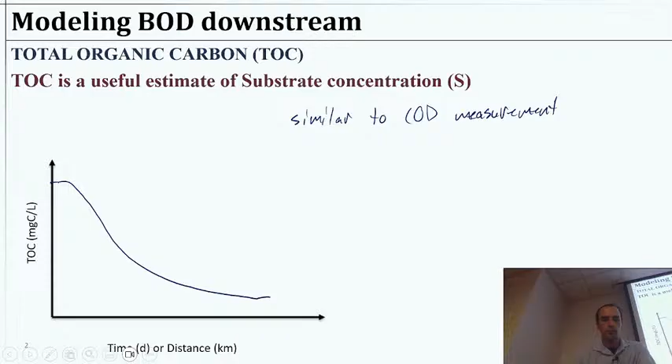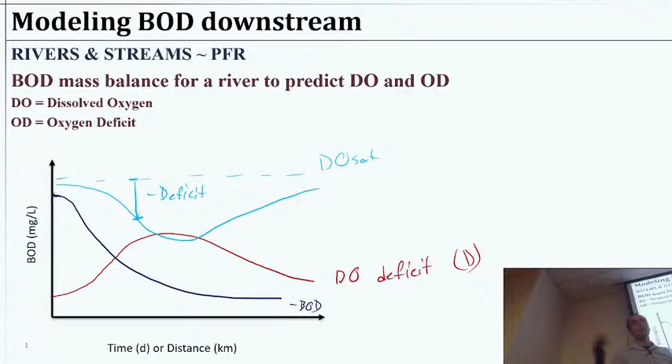So you could look at the deficit in two ways. One is just the difference between this line and the current spot—that'd be the deficit at any given point. We could potentially plot that as a value that increases up until the deficit is at a maximum, then starts decreasing again as reaeration happens. So a few ways to look at that. We talked a fair bit about that already. This would be the DO, whatever the current dissolved oxygen level would be.

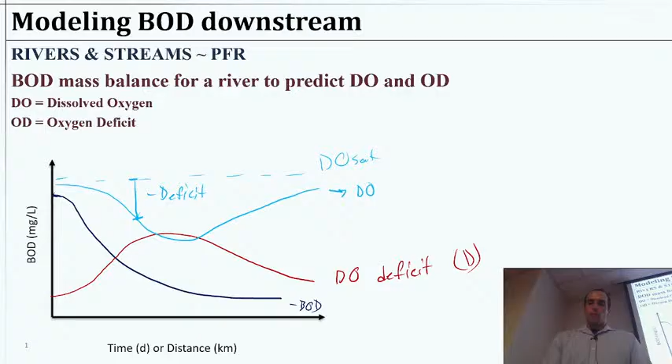So that's a useful way to look at the scope of what happens in a stream or river when we discharge biodegradable organics, wastewater stuff. We talked a little bit about how to measure it. Here was a slide where we went a little deeper on the DO. And then we began to talk about how do we model the amount of BOD that is still there.

This is kind of an odd thing to describe because the amount still there is really oxygen-demanding substances that have not demanded oxygen yet—it's a weird way to phrase it. So we can think of it as there's some ultimate amount, some initial amount. If we gave it an infinite amount of time, how much oxygen would be demanded by this food? How much food demands oxygen in our water?

We could say that at some time t, there is L sub t remaining BOD, plus whatever has been demanded up to that time. L naught would be the infinite BOD, kind of the starting point, and L sub t would be after some time, how much is remaining if at that point we gave it an infinite amount of time. So we could say L naught equals, let's say, L at day 5 plus BOD that has already been demanded at day 5. That's one way we could describe it.

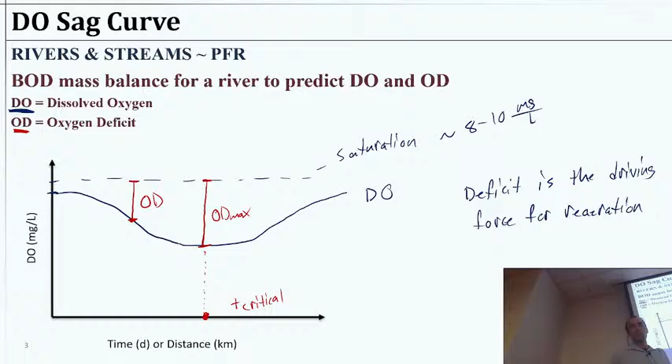We want to do this so we can have a handle on the actual amount of BOD that corresponds to what's happening with our dissolved oxygen sag curve and ultimately the stream and the biology altogether. So we can look at this L as a first order rate equation where biological activity is removing it, with some rate constant K. This would be our BOD reaction rate constant in some per-time units.

And then that's going to be rather straightforward. We're going to keep to rivers and streams for this type of analysis, so we can look at some time in a plug flow like system in a stream or a river. If I said lake, I didn't mean to - we're going to keep it to streams and rivers. That will give us some way to look at how our waste is changing as it flows.

So with that, we want to know how do we balance oxygen versus this oxygen removing action by the BOD. That's going to be this deoxygenation balanced against the re-aeration. So aeration meaning we're bubbling or somehow mixing oxygen with our water, and deoxygenation would be that rate at which the microbes are removing oxygen from the water.

So we'll have KD for the deoxygenation rate constant. That's essentially going to be the same K here, so that's our KD. RD would then be a rate of deoxygenation. We could describe that, just like we were a moment ago, as KD times L naught times e to the minus KDT - we're just connecting the dots here. That would be our rate at which we're removing oxygen from the water.

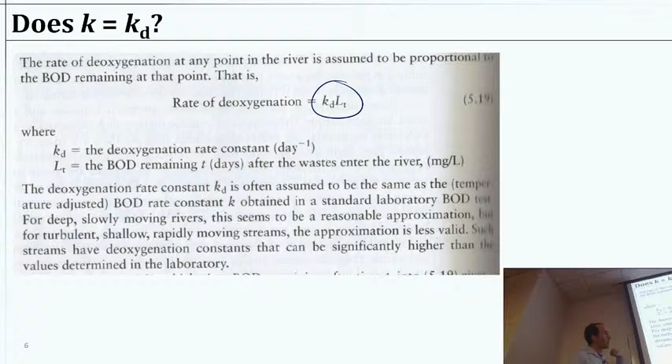But we are going to distinguish, and I think I misspoke earlier, which is why I have this slide to remind me to correct myself. The deoxygenation rate constant KD is often assumed to be the same, once temperature adjusted, to the BOD rate constant we find in a standard BOD test. For deep, slow-moving rivers that seems reasonable, but if we have a lot of reaeration, it's less valid. So we can't always say exactly that - we're going to keep those separate.

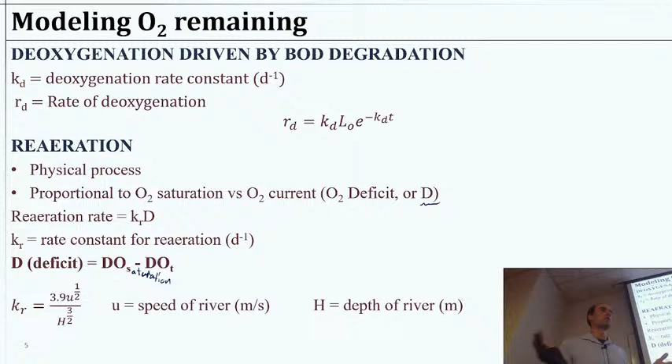I mentioned earlier this K being the same as this KD - I apologize, that's actually technically incorrect. Sometimes it's correct, sometimes it's not. So just keep this equation you'll have, I believe, on your equation sheet, in mind - a rate of deoxygenation will be related to that, but could be separate.

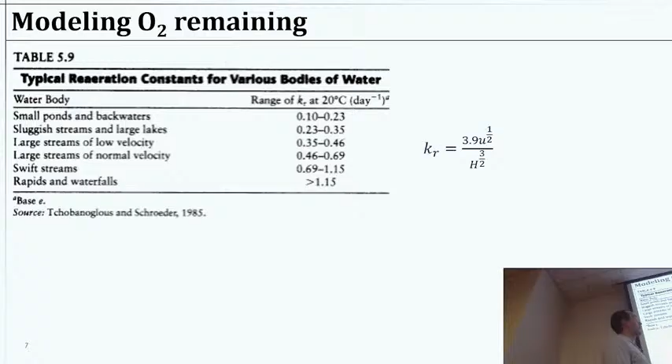Here's a few typical water bodies - what are their KR values, just as a reference point? So this is KR that we were describing. If we have a small pond or backwater, this reaeration rate constant is somewhere between 0.1 to 0.23 per day. Compare that to a sluggish stream or large lake, 0.23 to 0.35, going all the way up to rapids and waterfalls being larger than 1.15 per day as the units.

So if we put that into some calculation, we'd be able to see what that's doing to the oxygen. We could even make a plot and do some graphing about what that looks like - might be a fun use of MATLAB or something. I'm not going to make you do that.

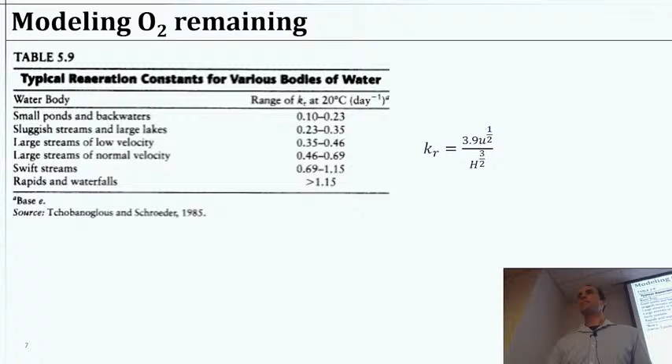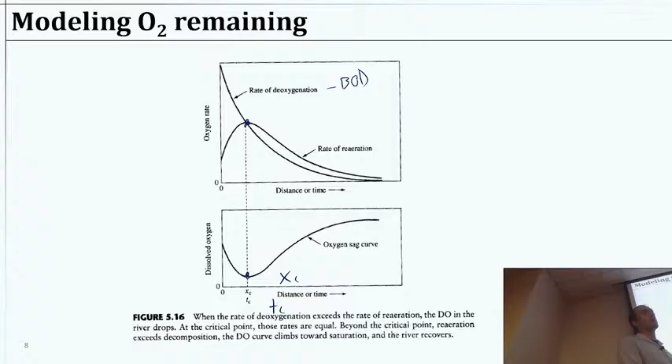But what I'd like to do is look specifically at how we determine the critical point where we have the most important impact, which is the time when we reach the highest deficit, or the lowest dissolved oxygen amount. Those are the key moments we're really concerned about, and want to design our treatment to make sure that moment isn't so bad that it causes a fish kill or otherwise harms the environment. Because if we can discharge just a small amount of BOD and nothing bad happens to the environment, that's probably what we want to be doing.

It probably doesn't make sense to try to get rid of 100% of the BOD, but it also doesn't make sense to kill everything. So putting all these curves together, if we draw it better than I did earlier, we can identify a critical point. As BOD is dropping through here, our rate of reaeration is going to start increasing because we're getting some oxygen deficit. So we'll have increasing reaeration rate up to a point, which caps out when our oxygen deficit is at its maximum. If we look at our dissolved oxygen here, the lowest point - this is the largest deficit, D.

That's going to be the moment where our reaeration is happening the fastest, and we can learn something about the whole system. We can also identify this critical time point, TC, or this critical distance. If we're discharging here, how many miles downstream does this happen? What town or place is affected could be quite important, especially if we're trying to figure out who's causing the problem when we find a patch of the stream with degraded water quality.

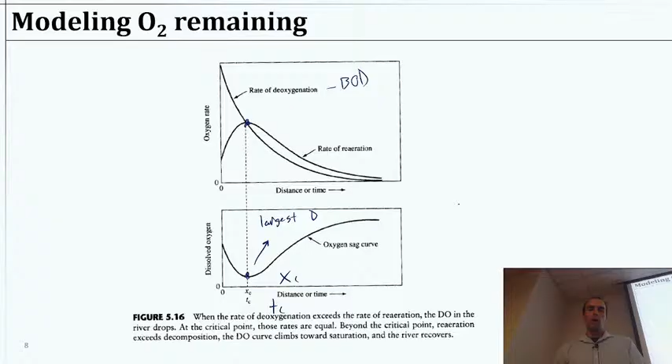Okay, so to model this, we want to take a look at some equations. To model the oxygen deficit, we could start with dD/dt, the rate at which the deficit is changing. This is equal to the rate of deoxygenation minus the reaeration. This feels a little upside down because we're talking about the deficit, the lack of something, so to track its change we say deoxygenation rate minus reaeration rate.

If we take those two rates we described earlier, they are Kd times L naught times e to the minus Kt — that's our deoxygenation rate — minus the reaeration rate, which is a little simpler, Krd.

All right, so take a moment and integrate that.

Yes, that should also be Kd, sorry. And I'm just kidding, by the way — this is a tough integral, we're not going to do that, we're not even going to bother with that. Fortunately, the book does that and gives us an answer. As we'll see, this is probably something you could do if you go back to calculus and scheme about all of that, but we're just going to take the book at its word.

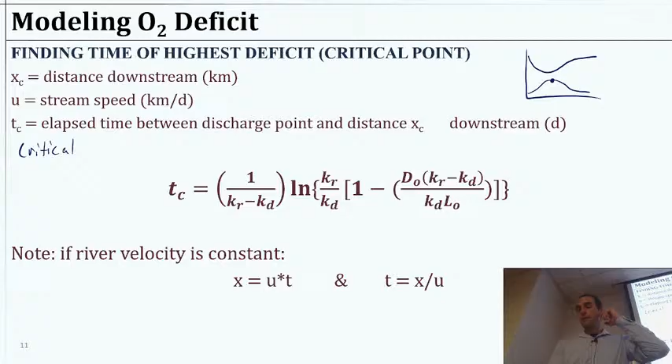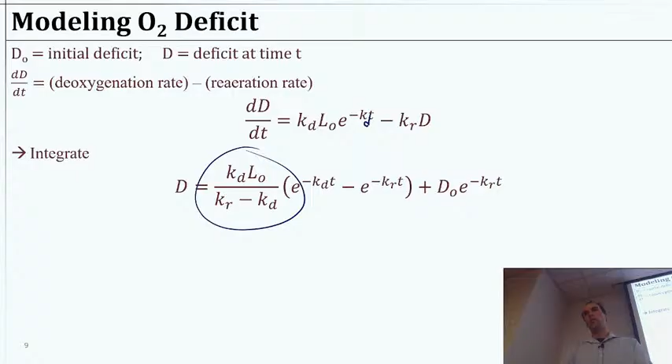I hope you recognize that it is possible to integrate that equation, and we'll get this result, but I'm not going to be asking you to integrate that on the exam or the homework. What I want you to know is how to handle these equations, and when we have to use the alternate equation. I'm going to give you both, so you'll have both on the formula sheet.

So with that, I want to give you some practice time to work on this—I've got actually two here. The first one is example 5.7 from our book, says the wastewater in a previous example is summarized in this table up here.

It has a dissolved oxygen concentration of 2 milligrams per liter, a discharge rate of 1.1 cubic meters per second. The river receiving this water has a dissolved oxygen equal to 8.3 milligrams per liter, a flow rate of 8.7 cubic meters per second, and a temperature of 20 Celsius. Assuming complete and instantaneous mixing, estimate the initial dissolved oxygen deficit of the mixture of wastewater and river water just downstream of the discharge.

I'm sorry, this is not a table of the water quality—this is a table of oxygen solubility according to temperature. So we've got 20 Celsius here, which corresponds to 9.09 milligrams per liter of oxygen. We'll go ahead and use that. It changes a little bit—this includes chloride, but since this is fresh water, it's going to be close enough.

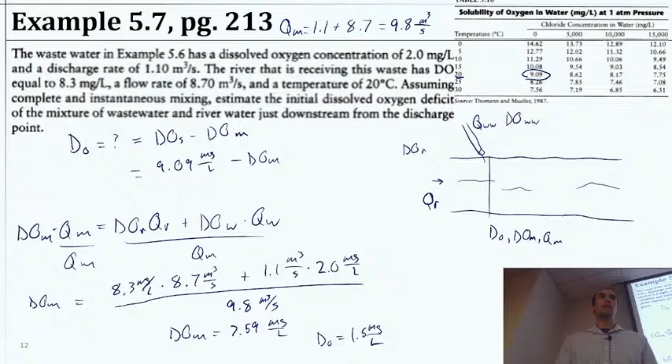Okay, so then let's put the other equations, the fancy ones, to use. So the next step, we're going to follow that and say just...

Below the point of some continuous discharge of pollution as it mixes with a river, the BOD is 10.9 milligrams per liter. The dissolved oxygen is 7.6 milligrams per liter. And the river and waste mixture has a temperature of 20 Celsius, a deoxygenation constant KD of 0.2 per day, an average flow speed of 0.3 meters per second, and an average depth of 3 meters.

In other words, we're just continuing from the previous problem, and now we have something about the KD and about the speed and depth of the river.

So part A says find the time and distance downstream at which the oxygen deficit is at a maximum, and then B, find the minimum value of dissolved oxygen.

Okay, I'm going to give you guys a little bit of time, maybe 10 to 15 minutes range to work on this. See if you can get it, work together if you'd like, and then I'll work through the solutions with you. Welcome to ask me questions as well.

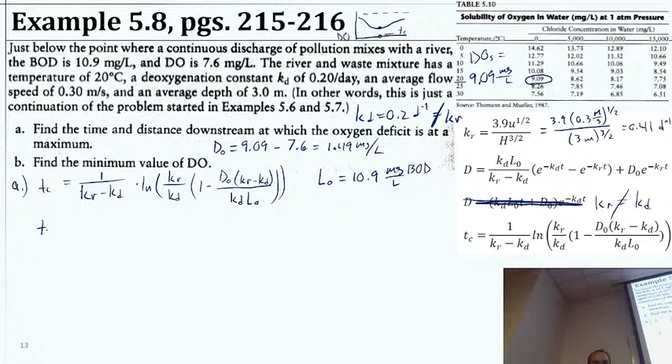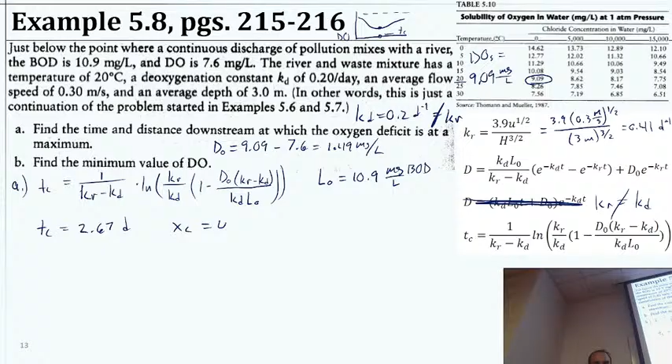That's maybe the tricky part of this is remembering the D and the DO were not the same thing. If you get the D, it's the DO is whatever it's supposed to be minus the...